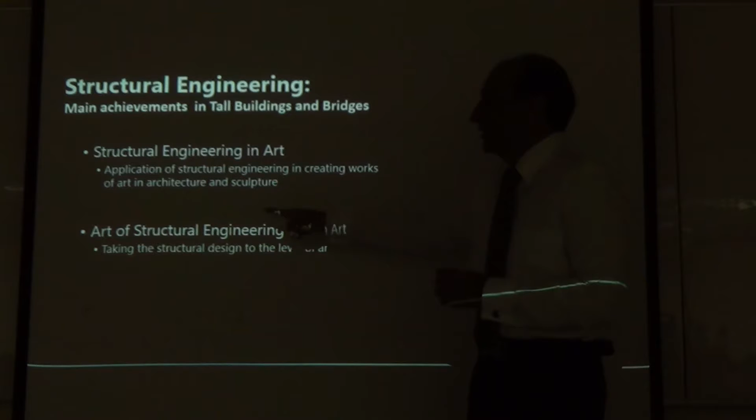So structural engineering is, in art, or there are two sentences you should think about: structural engineering in art, and art of structural engineering. One is the use of structural engineering in assisting people who are creating art. That art could be a bridge project, an architectural monument, or anything. If somebody has conceived something, an architect or anybody, and you help that person make it real, that is structural engineering. Architects cannot, they dream. You make it possible.

Structural engineers make it possible for their dreams to come true. They dream about donut-shaped buildings, all these funny things in Dubai. Who makes it possible? Structural engineers. Architects think about twisting buildings, rotating towers. Who makes it possible? Structural engineers. Some transportation people dream about a bridge connecting two islands. Structural engineers make it possible. So the people who dream are the artists or dreamers, and structural engineering helps them achieve their dreams. That is structural engineering in art.

The second one is art of structural engineering itself. That means any discipline, any field has levels. First of all, everything starts at philosophy. In the old times, we didn't have physics, we didn't have engineers, we just had philosophers, the guys who had all the knowledge, like Socrates, Plato, all these guys. They were good in physics, good in everything. The whole knowledge of that time, one person could possess.

Let's talk about this course now. This course is going to be divided into two groups because we are dealing with two subjects. I have tried to integrate them so we can continue from one course to the other. We will start today with Introduction to Structural Engineering Design and Approaches, one lecture. The second topic will be Introduction to Tall Buildings, one lecture.

Then we will move to Introduction to Bridges. I thought a lot about whether we should finish the buildings first and do the bridges later, but I think that's not a good way to go. The reason is, I want to give you the option to choose your term project, tall building or bridge. But if I teach the bridge later, those who want to do the bridge project will not have any knowledge to do it.

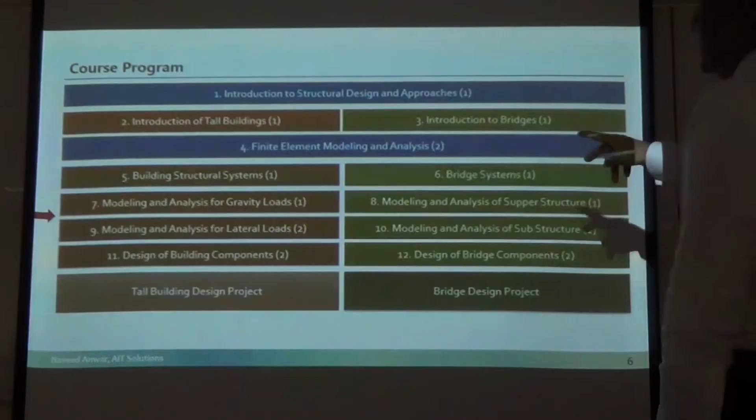Okay, so this is where we will go, we will do that one. Then there's going to be two common lectures on finite element modeling and analysis, common to both courses. I'm hoping Dr. Punchet will also be offering finite element theory, while I will be offering the practice. So this is a little bit ahead of time.

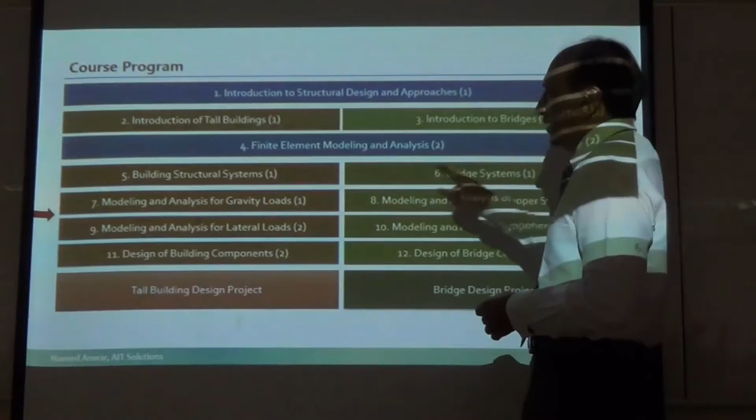Then building structural systems, then bridge systems. Modeling and analysis of gravity loads for buildings, modeling and analysis of superstructure for bridges, modeling and analysis for lateral loads, modeling and analysis of substructure, design of building components, design of bridge components. They will go hand in hand, one lecture on buildings, one on bridges, so you can compare how the two are similar or different.

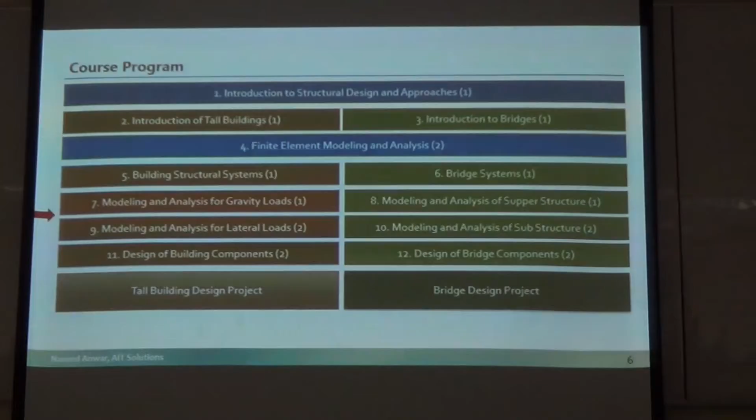After this will be the midterm, and then we will start the project. One real 40-story building, which you will be required to design completely in groups, and one real bridge that you will be required to design as a group. All right, so that is the plan for this course.

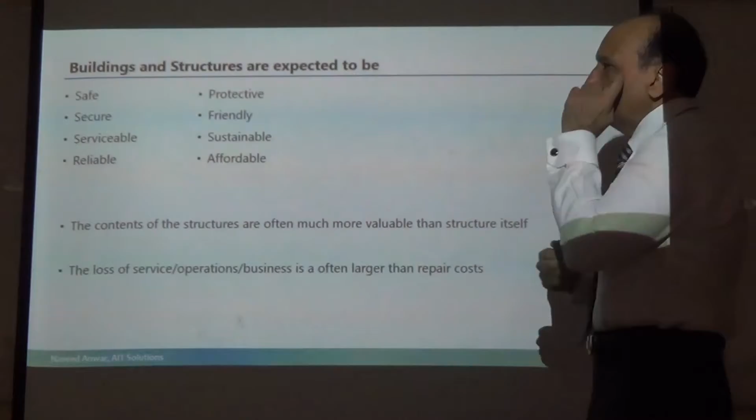These days, buildings and structures are expected to meet changing public expectations. Forget about the Golden Gate Bridge, forget about Burj Khalifa. There are millions of smaller buildings being made, and thousands upon thousands of bridges being made, which are more useful or used by people on a daily basis, and you will be working mostly on those. All of these need to be safe, secure, serviceable, reliable, protective, friendly, sustainable, and affordable. All of this is the expectation of the public, non-engineered people, they want their buildings to be like that.

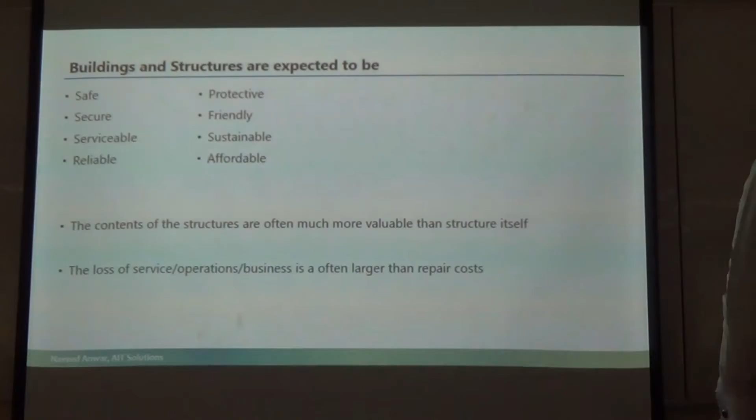The contents of structures are often more valuable than the structure itself. Do not forget that. Most of the time we think structure cost is very important, but actually structure cost these days is much smaller than what is inside the structure. Like a computer center, a hotel, a hospital, the cost of the equipment, furnishing and things inside is much more than the cost of the building. So damage to the structure is not as important to the owner as damage to the property inside.

So it's not only that we have to protect the structures, we also have to protect what is inside them. It's not enough these days to say my structure is going to be standing after an earthquake or a windstorm. No, it's also important that nothing inside the structure will be damaged.

So we have to consider both structural and non-structural, and also the important thing about sustainability. Everybody is talking about environment, climate change, and sustainable structures. So you cannot just make a structure without considering environment and sustainability. So the game is changing.

It's no longer designing reinforcement and thinking, I've done my job. Not enough. You need to think beyond that. You need to sit in a meeting where people will come and say, have you considered sustainability? And you're looking at him, what? Because engineers do not know what sustainability means and how it can be included in their structural design. Those things are important.

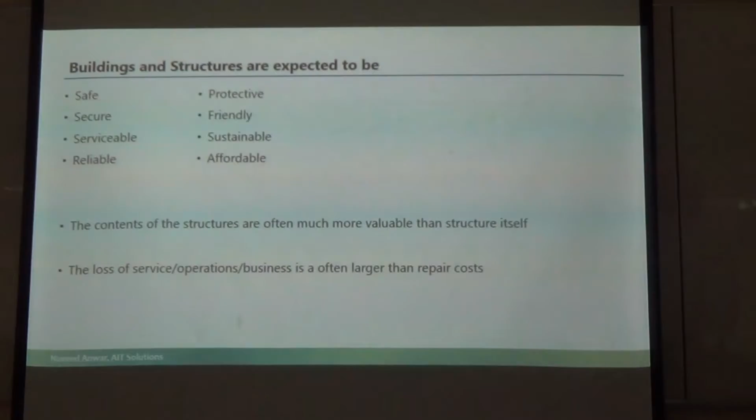This time I have two students doing thesis on non-structural components, damage to non-structural components due to earthquakes, looking at what is the cost of that, because we need to be able to design for that.

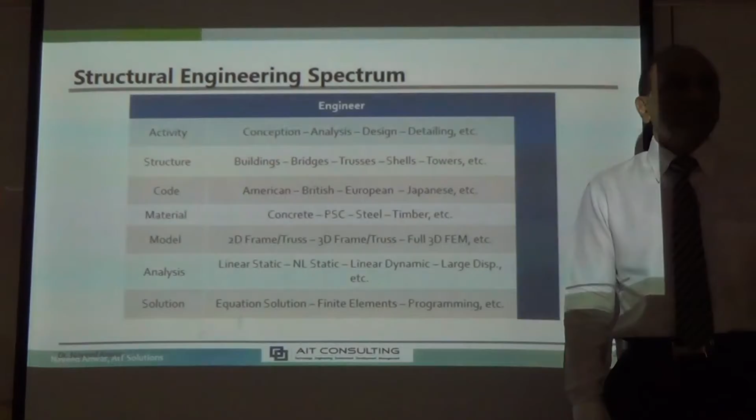Structural engineering is a big field, a very large spectrum. It is very broad. If you look at it, in terms of the engineer, they are required to do many things: conception, analysis, design, detailing, and so many things. There are many structures to design: buildings, bridges, trusses, shells, towers, and so many others. There are many codes to follow: American, British, European, and so on. Many materials in which you can design: concrete, pre-stressed concrete, steel, timber, composite. Many modeling that you can do, many analyses: linear, non-linear, static, dynamic, many types of solutions you can follow. So it's a very broad field, too many things to do.

And no one person can be an expert in all of that. Or maybe you can, by the time you reach my age, but not so soon, right? But you have to choose a bit about what specialty you want to go and work in, in terms of the type of structure you want to specialize in, in terms of the materials you will be focusing on, and so on.

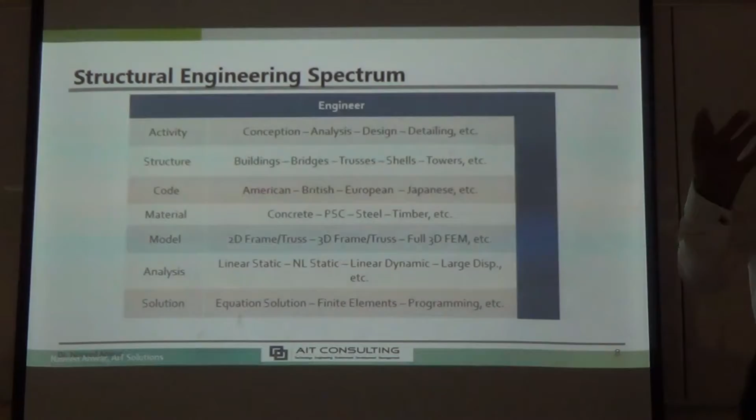If you're going to work in international organizations, building codes, you have to learn many. One may not be enough. That's why last course we tried to learn things beyond the building code, so that you can use any building code. Linear analysis, you should be able to do different types of analysis. Simple analysis that people do is not enough anymore. You have to go beyond that, especially if you have done a master's degree. People will expect you to go beyond the normal. So we need to learn all of that.

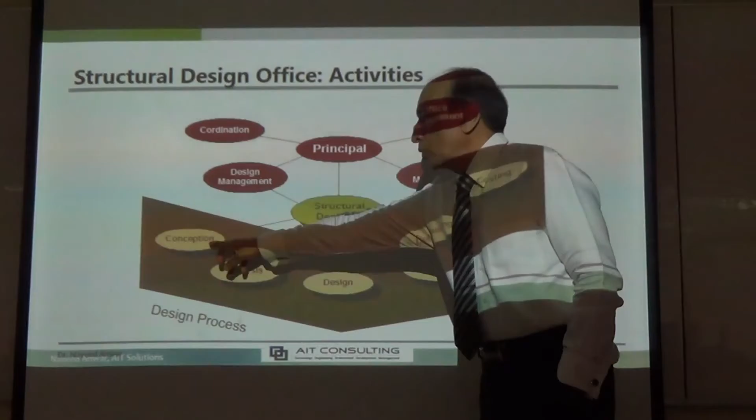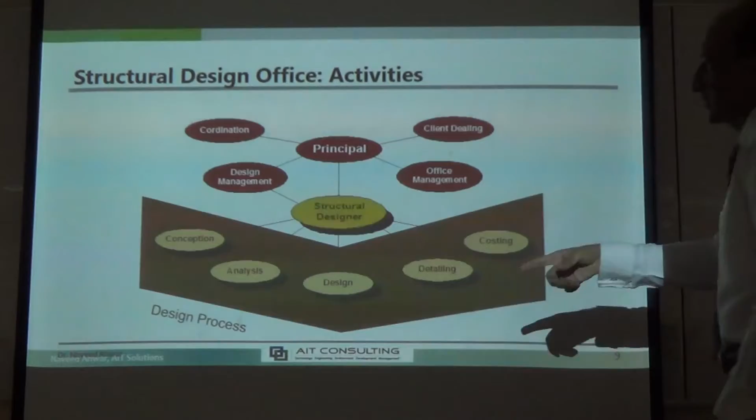Design office, as I mentioned, in a typical design office, engineers are required to do these activities: conceive, conception, create the concept, develop the building system, develop the structural system, think about how to solve the problem, the bigger decisions. Analysis, modeling and analysis, then design, then detailing, then costing. So you need to know the costing. Many of my theses this time are related to costing.

For example, finding the least cost bridge type for a flyover. What is the most economical span for a bridge? What is the most economical structural system for a building? So cost becomes important. If you have no idea about costing, you cannot be a good structural engineer, because that's the first question anybody will ask you. They will come to your office and say, which is the most economical structural system for my building? What do you say? Let me work on it and I'll tell you after 1 month? No, they will say, okay, bye-bye, let me go find a person who has the answer right now. So you need to have this knowledge and understanding of the cost related to structure and structural systems.

So all of these things, and detailing - no matter what you do, the final output of your design is detailing, the drawings that you send to the site. The person who is going to construct the bridge or the building, they only look at your drawings. They do not care, or do not know, which software you use to design, what method you use, nonlinear analysis, linear analysis, which code you use.

It doesn't matter. All they have is a drawing in front of them telling them, make a column of 1 meter by 1.2 meter and put 24 bars, 5 here, 6 here, put the ties here, the spacing of that. That's it. Put concrete of this strength. That's all the information they have and want to know. How that information becomes a real structure is up to you. So detailing is very important.

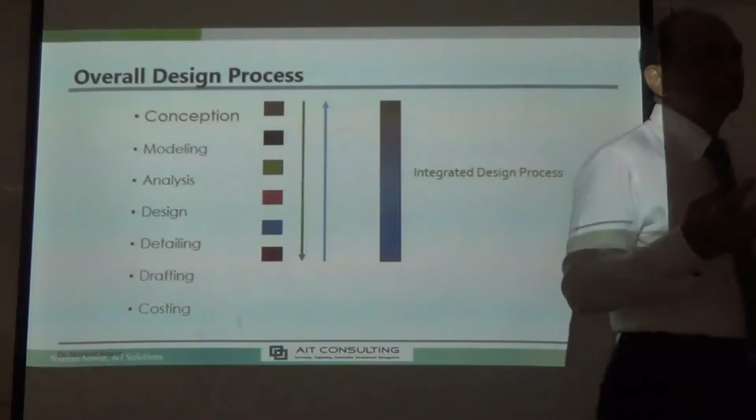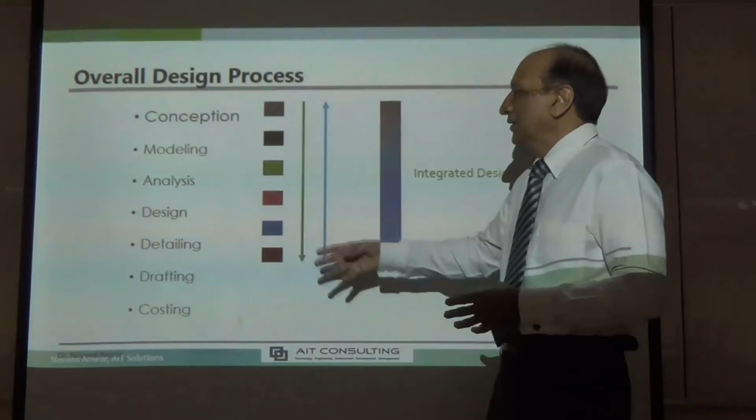This is the typical way that most engineers should work. They should start with conception, meaning the idea of how to solve a problem, how to design a structure, what system to use. Then go from that to modeling, converting that idea into a mathematical model or a computer model. From that modeling, go to analysis, analyze the model, not the structure. Then design the elements, do the detailing, and then drafting and costing. So that is how, step by step, we go from one to the other.

Yes, you want to ask something? No? Just waving your hands.

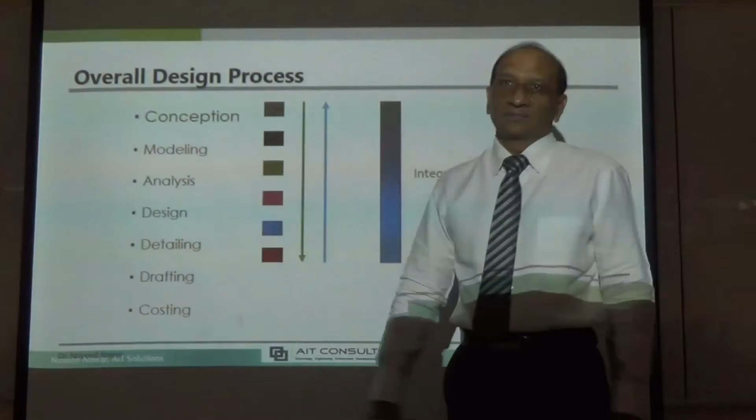But most of the time, this is not possible. Theoretically, it should go step by step, but actually it's not possible. The client may come to you and say, tell me the cost of this system, bypassing all the other steps, which means you need to know the answers to many things without going through the process. This is very difficult, very strange, because you haven't done the design yet and somebody is already asking you the cost. You might say this is ridiculous, but that's reality.

And then when you start the process and finish everything, the client changes their mind. They say, oh no, I don't like this, can you change this? Then you have to go back and revise. All the time things are changing, so you have to keep going up and down in your process.

That's why we say this is an integrated design process. That means all the steps are happening at the same time in your mind. A good structural engineer should be able to do everything at the same time. So when doing the conception, the cost is already in mind. Doing the modeling, the results are already in mind. You develop this sense of the whole process in an integrated manner. Once you have enough experience and knowledge, you should be able to do that.

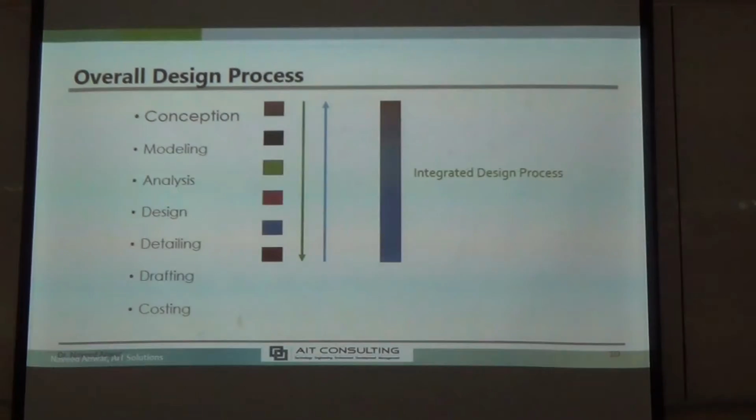So you can divide the process into three main categories. Whether it is bridge or building or any design, it is three groups of activities. I'm going to talk about each of those groups in different lectures.

The first one is conceptual design, the most important step. That means deciding what is going to be my solution to the problem. I have a problem: the architect says I want to design a building, 50-story, 40-story, that is the planning. What system am I going to use? Concept of the system, structural system concept. This is called conceptual design.

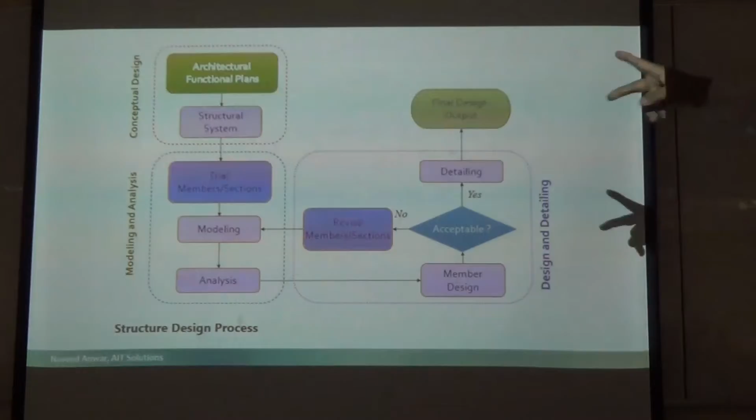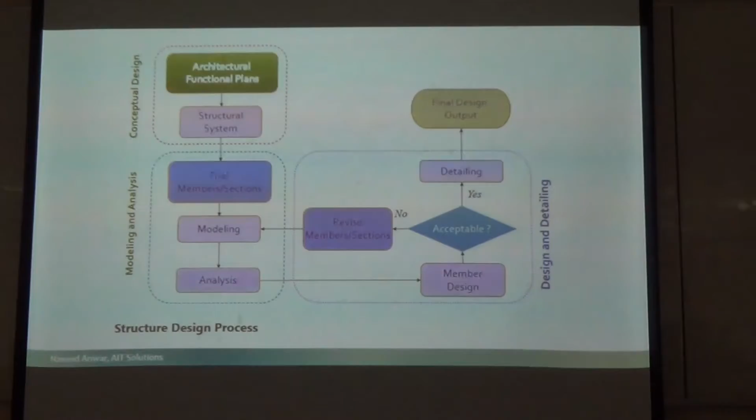So the first lecture or two will be about this part, a very important part, because if you make a mistake here, you will go in the wrong direction. It's just like you want to go there, but you start in this other direction, and you have to do a lot of corrections to get back on track. So the structural system must be more or less in the same direction that you want to go. That decision is very important.

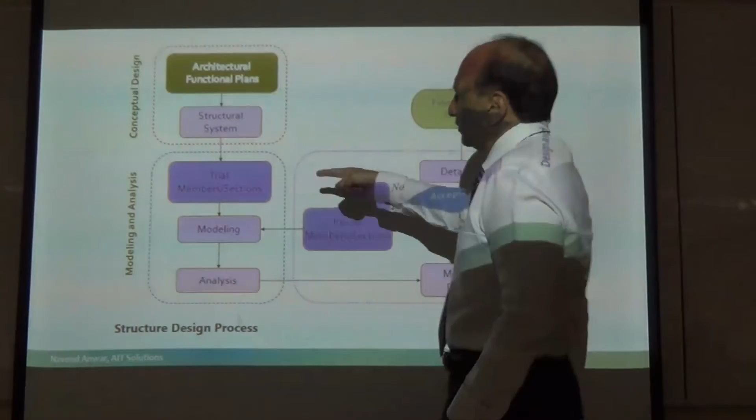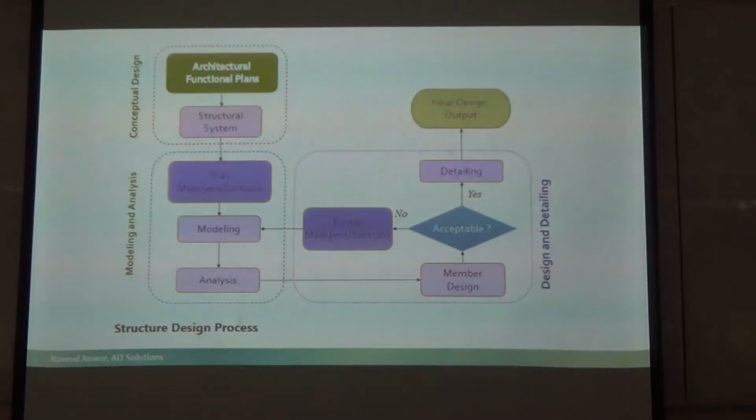Modeling and analysis are technical, highly technical steps. Conceptual design requires thinking, imagination, innovation, while this step is more or less mechanical, meaning more or less procedure, learning the techniques, the tools, how to do things, learning the program. So trial sections, modeling, and analysis are combined into one process where you need to use the software. We will spend four lectures on this part, two plus two.

This one is called design and detailing. That means after the analysis is done and you get the result, you have to figure out what size of member you want to use, how much reinforcement you want to put, using your knowledge of...

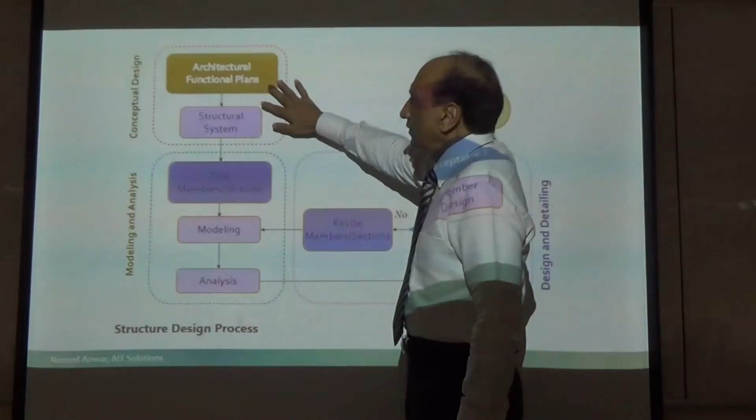In this case, we are going to talk about the concept. Here you will need the knowledge from Dr. Pennung, Professor Pennung, about dynamics, and from Dr. Punchet, about structural analysis and finite element analysis.

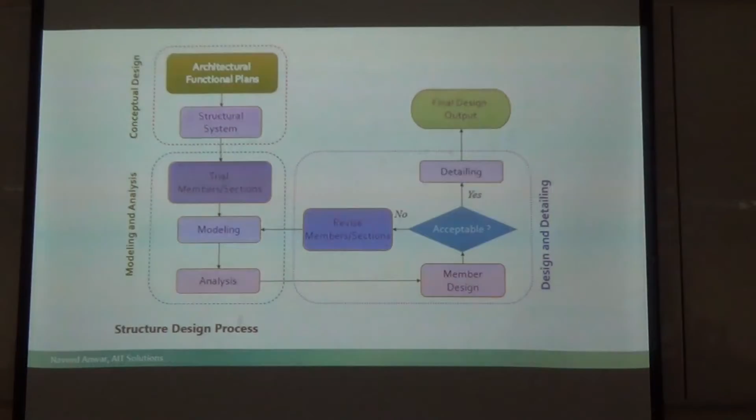Those kind of backgrounds will be needed on structural analysis, theory of structures, structural dynamics, wind engineering, earthquake engineering. All of those will come, moving load, those kind of things will come here.

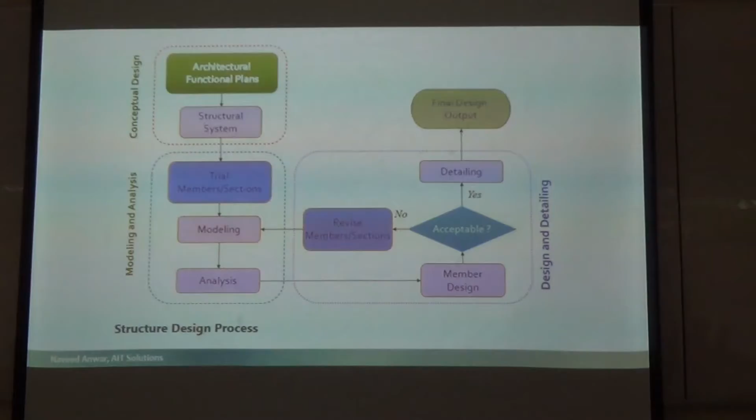In this group, design and detailing, we are going to talk about design of components, design of beams, design of slab, design of foundation. So you will need knowledge from concrete design. We are not going to do steel, so steel can be out. We are only doing concrete. So you will need the concrete design knowledge. You will also need some knowledge about foundation design, things like that.

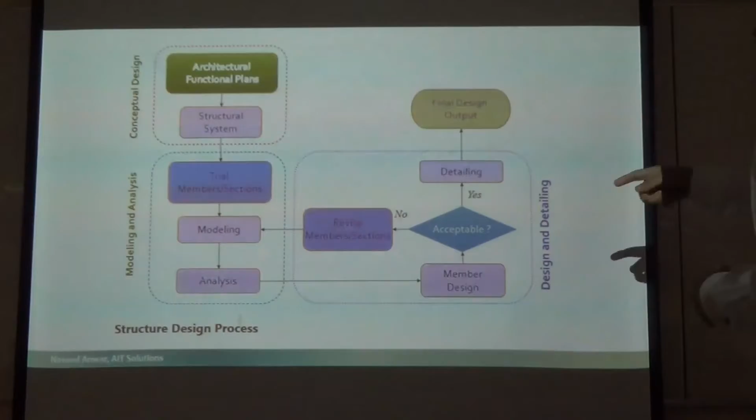And then we will get the detailing. We will talk about it a little bit, and then final output. So this is the overall process, and this is how this course will go.

So when you start any design, I'm talking now about the first part of the group, conceptual design. You need to really understand. Please remember, this course is very practical, so we are talking about the actual way things work out there when you graduate. When you start a project, you need to go through what is called a pre-design phase. Before you design, you have some information gathering. You need to gather information, collect data, understand the problem. This is called a pre-design phase, in which you talk to people, talk to the client, ask what do you want. So it's more like understanding the problem before you start designing. And you talk to many people at that time, or many people will come and talk to you.

Then site analysis. Second part is where it is going to be made, this structure, bridge or building. Is it going to be in Thailand, Philippines, Myanmar, where? Because that will govern many things. It will govern the loads, the codes, the material, the construction methods, it will govern many things. So you need to understand where it is going to be. Not everywhere do the same rules apply. So location or the site is important. Then also about the location, what is the ground condition, what is the seismic loading, what is the wind direction, all of that information will be needed.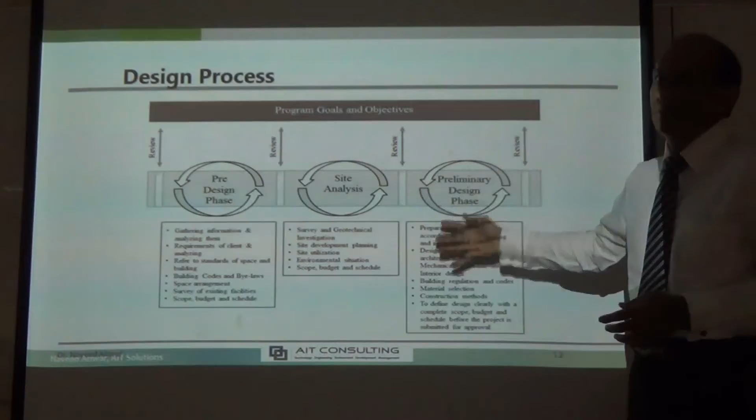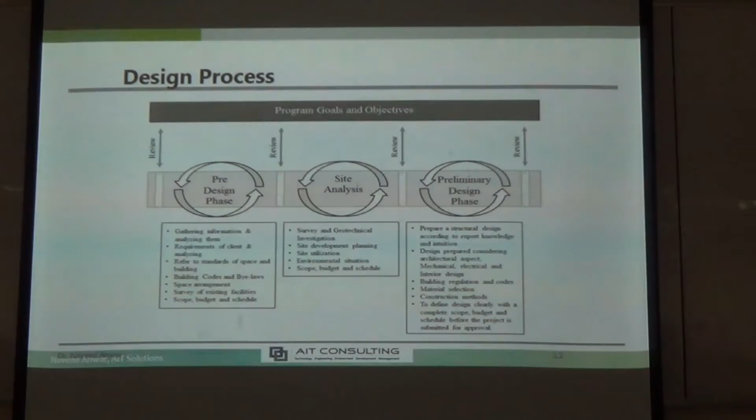So first, understand what is to be built. Second, understand the location and site where it will be built. And then we do a preliminary design. Preliminary design means we do some simple hand calculations or use thumb rules, or use our knowledge and experience to come up with some possible solutions. And then we go to the detailed design. So that's how the process works. And this is for any project, doesn't matter. Building, bridge, water tank, anything you want to do goes through the same process.

Now, coming back to our role as structural engineers, what is the main purpose of design? If you look at the very main purpose of the design, there are many purposes, but the very main purpose is this one. I showed this slide before also, right? No? Yes? Never mind, you forgot. Don't worry, they forget already.

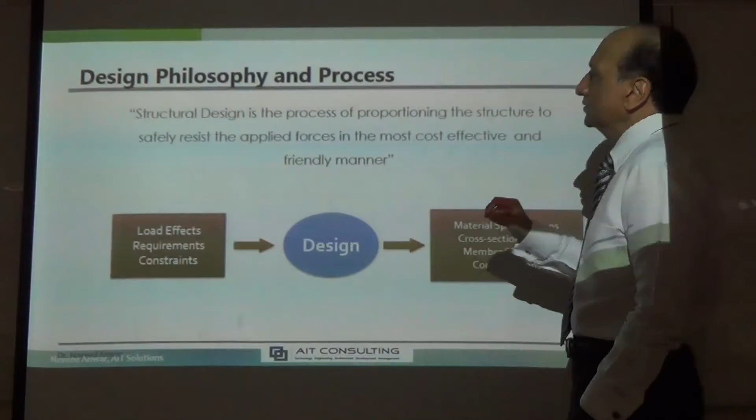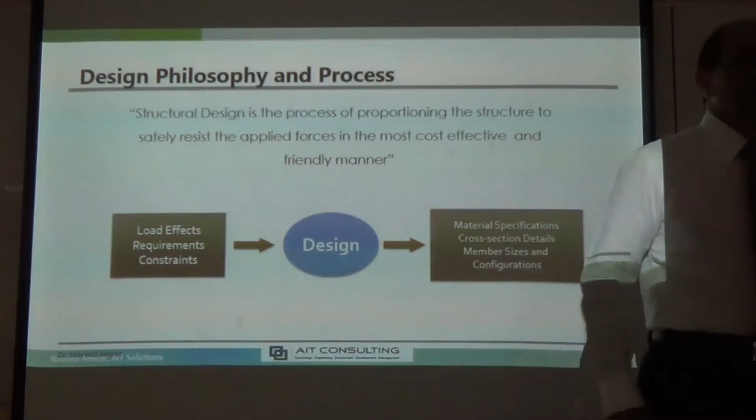Structural design is the process. Please understand this definition very clearly. It contains very deep, important meaning. Every word is very important. Structural design is the process of proportioning the structure to safely resist the applied forces in the most cost-effective and friendly manner. So it is a process in which we have to proportion the structure. What does it mean, proportion? Proportion means sizing members, materials, reinforcement, how they are put together. Everything about assembling the structure or defining the structure is called proportioning.

And that is the main task, to proportion the structure to serve its purpose in such a way that it safely resists the applied forces due to any reason. At the same time, it is cost effective, meaning the cost is acceptable within range. You cannot just make something so expensive that it cannot be made. Unless it's Dubai, they just make anything. But in the real world, other than Dubai, cost is very important.

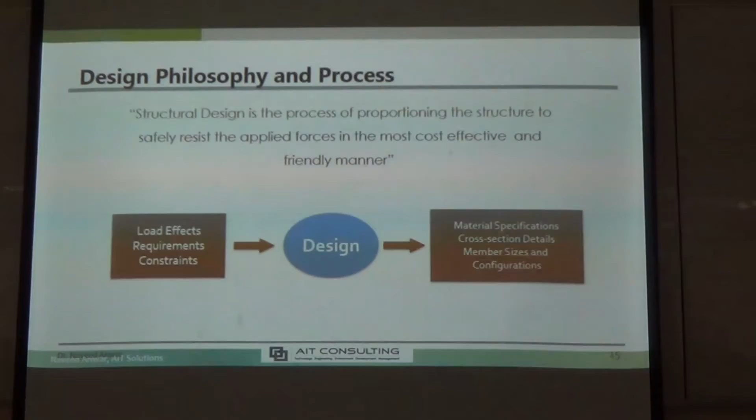And friendly manner, what does it mean, friendly? Friendly means everything friendly: user friendly, environment friendly, sustainable. Many friendly things come into play. So it's not only safety, but all the other things come into play. Structural design is a process in which you take a requirement, form a system, and find the sizes in such a way that it is safe, number one. At the same time, cost is acceptable, number two, and it's friendly, number three. So all these three things are very important, and these are big definitions.

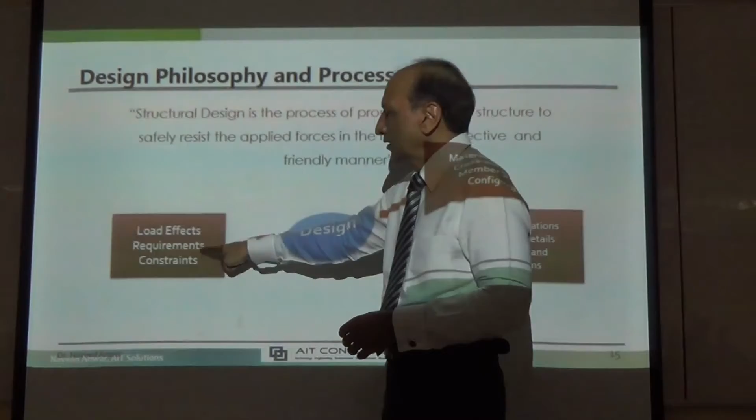So in theory, load, requirement, constraints go to the design and come up with the outcome which can be sent to the site: material specification, cross-section details, member sizes, configuration. So these are drawings. Basically it's like a black box to the outside world.

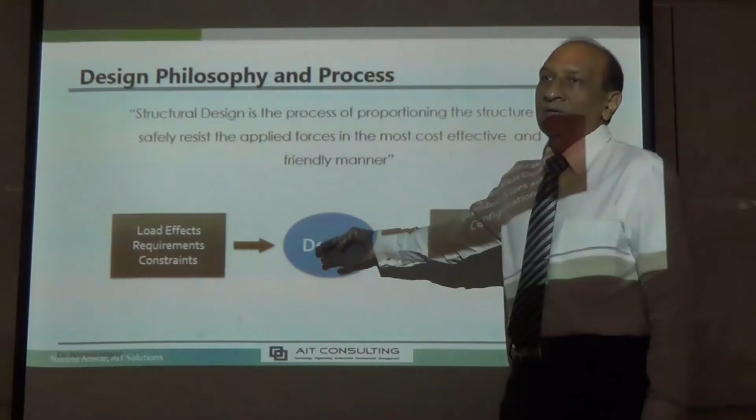They hire the engineer, give them the requirement, and expect drawings to come out. It's like a machine: you put something in, and drawings come out. But inside, there are many things to do in this design process, and that's what we're trying to learn. Let me talk about two important definitions: structural analysis and structural design. Both are part of the design process but very different activities. In big organizations, engineers who do analysis are a different group from those who do design, detailing, costing, or conception. In a small firm, you do everything.

So, analysis and design. Structural analysis is a procedure where you take the structure, create a model, use a computer program, and calculate the response of the structure, and then you stop. Design is a process where you take that response and use it to find the sizes, material specifications, reinforcement, and section sizes, and after that send it to the drafting people.

So analysis is general, can be applied using the same software for everything. Design is very special, different procedures for beams, columns, steel, concrete, slabs, and so on. So design is very broad, while analysis is more standardized and generalized. We will spend time on both of these.

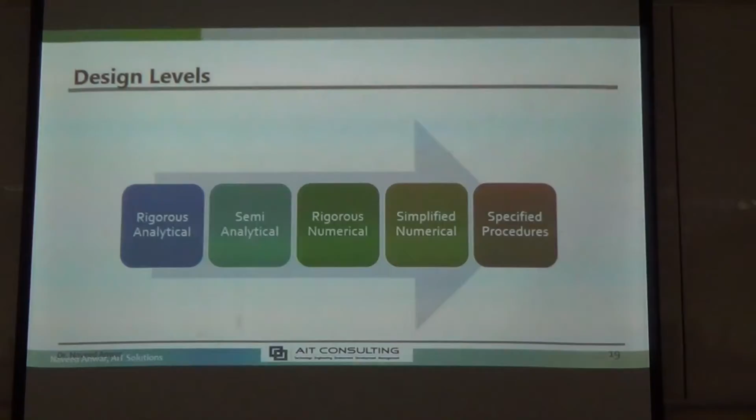Let me skip this one today.

The one question you will be asked in your career, whenever you work in this field, is: is my structure safe? Clients, the public, your family will ask you this. I live in a building, and once in the elevator a guy asked what I do. I said I'm a structural engineer. He asked, is this building safe for earthquakes? We just met, and his first question is whether the building we're in is safe, expecting me to answer right away without doing anything. What can I answer him?

Let me make a model, go back to the office, give me 100,000 baht or whatever, and give me six months, and I'll come back with the answer. He would lose interest completely.

But this is the most common question you'll be asked, and unfortunately structural engineers do not have the answer to this basic question. I told you the main objective of structural design is safety, but even after that we still cannot answer this question. Actually, you cannot say it's safe, because safety has a very difficult definition. If you think you can answer that question, you are wrong. Stop thinking that you can answer that question.

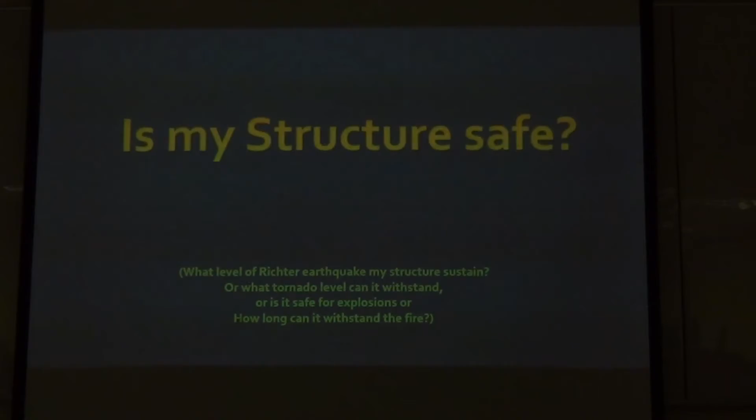And the next question is, what if I want to increase the life of a structure? What will you do? Can you design a structure which will last 200 years? Or 100 years? We don't think about this, because we don't relate the structural design to the final questions that people are asking. That is why the structural design process is going through evolution, changing design philosophy and approach. I want to tell you where we are going. We will not go there in this class, we cannot, but at least you know where we are heading as a profession.

This is what is happening in structural understanding over history. Long time ago, we started with certain methods and now we are changing and evolving into newer methods. I want to share with you how this process is going on, where we are at this time, and where we plan to go. Not you and I, but engineers in general.

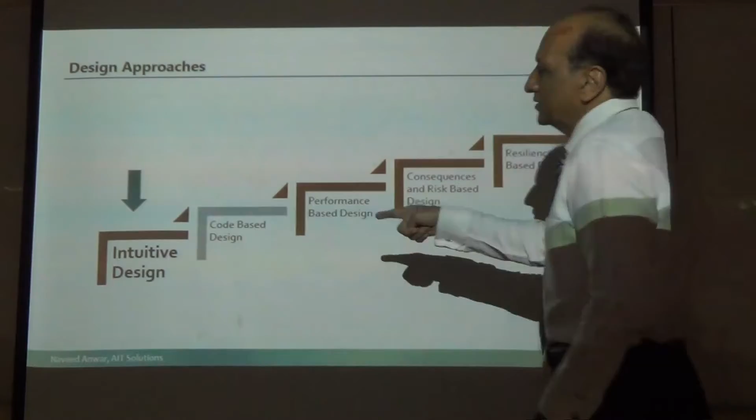So these are the steps that we have to climb, that we are going ahead now. First step was intuitive design, which was history.

People before computers, before calculations, before mathematics was invented too strongly, pyramids were made. Seven wonders of the world, most of them were made before computers, almost all of them, which means people had some understanding of designing huge things without calculations. That was intuitive design. People just knew something through experience or something, and they could create these enormous, huge structures or wonders. So that was intuitive design.

It still works, you can still do that. So what you can do now is do the intuitive design first, and then check the design by other methods later. The best way to learn structural engineering is to do the design without calculations first, keep it on the side, and then say, okay, let me check what I did. Rather than start the process as if you're trained to do some work, like a robot, don't do that.

So the good way is that when you get a problem, you say, I will touch the computer later. Let me think what the solution might be. Let me think what the column size should be. Let me think what the reinforcement might be. Just think from your side, don't do any calculations. Imagine that you are living 1,000 years ago. What would you do? How would you solve this problem where you had no calculators, no computers, nothing - only your brain? How would you solve that problem and solve it? Keep it on the side, then go to the next steps, then cross-check. Then you will learn much faster.

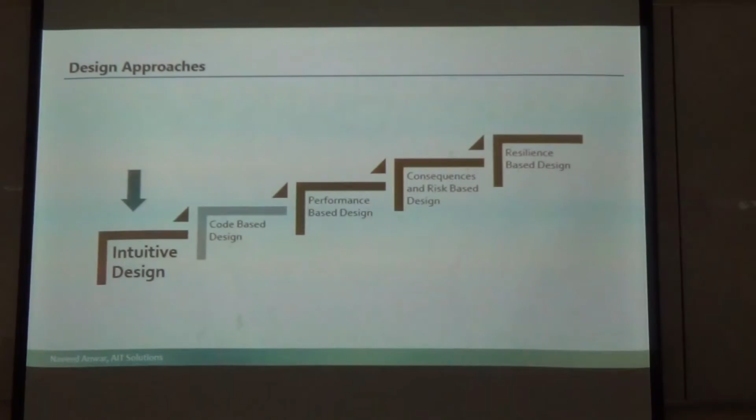Anyway, so this one was the old time, or it can still be used - intuitive design, only from your mind, from your intuition, you can design. But then came codes. Codes said this is not good enough.

Because you are dealing with public safety, you cannot play with public safety. What if your intuition is wrong? People will die, right? So building codes came in, regulations, rules. They said, no, you cannot do your intuition too much. You are not as good as people in the past, because in the past only the masters, a few people in the world, could build buildings of that kind. Now we have millions of engineers, so not everybody is of that level. So building codes come and define what you can do and what you cannot do to protect public safety, so that a large number of engineers can now do the design following the building code without doing intuitive design. The ones who do not have the capability to do intuitive design can follow the code.

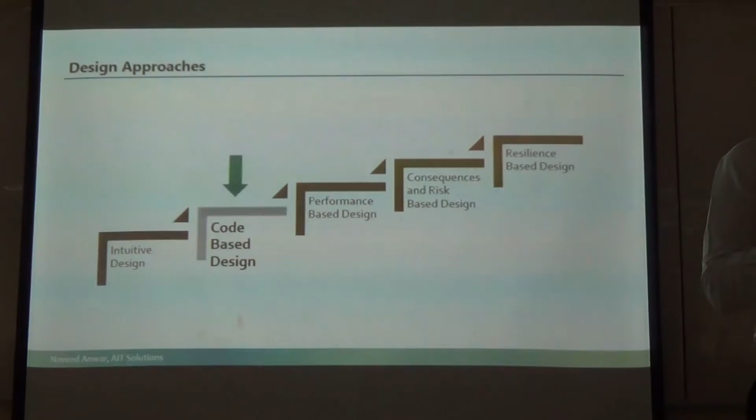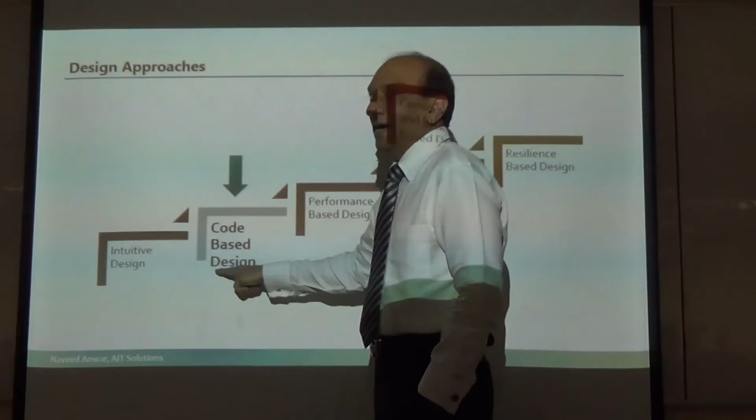And this is problem number one, why we cannot answer that question - building codes. And you know me, I have been always against following the building codes blindly, right? So building codes is one reason which prevents innovation. But they have a reason to do that because they don't want people to go out of control for public safety. So building codes is the second step, which is where we were, or we still are, at this time. We must follow the building codes, otherwise your design will not be approved, will not be built, people will not believe you. So following the building code is now a requirement to some extent.

So if you look at the building codes, the first building code was written in 1666. There was a great fire in London. The whole of London burned down, if you study history. And after that, they said, no, we must have fire code, we must have building code to make the buildings fire resistant. We don't want London to burn down again. So the first building code was developed basically to make the buildings fireproof, to make sure that the buildings will not catch fire, or they had at least 2-hour fire resistance rating so people can get out.

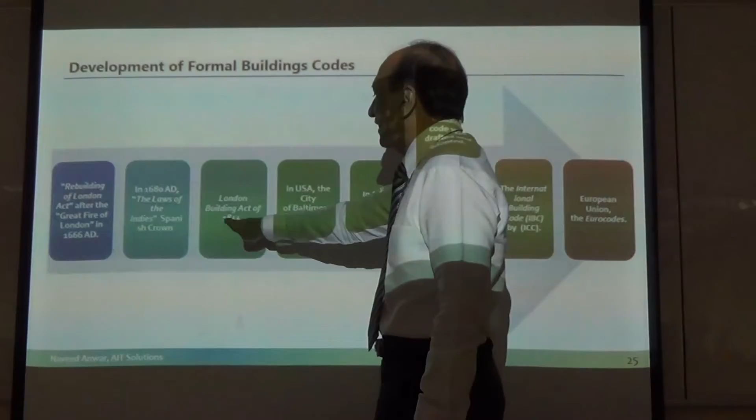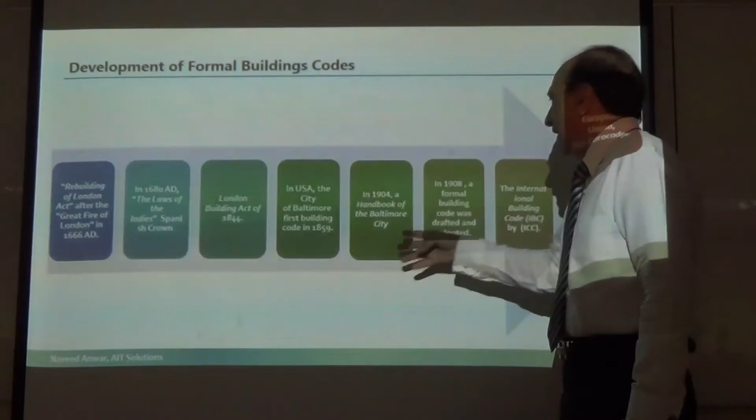So that was the first. After that, in 1680, the laws of the Indies in the Spanish crown in Spain, they made laws for buildings. So it started that time ago. Then London Building Act 1844, and then in USA the first building code was introduced in 1859 in Baltimore, and then after that 1904 Baltimore City Code, and then after that 1908 first building code, and so on. And after that millions of codes came up. Now we have thousands upon thousands of codes. But only in the last century, after that, we have the International Building Code IBC formed, and then European codes came in and British codes came in. So that is the history of the building codes.

So it started with that, and now we have so many building codes in every country, in every region, every city. We have lots of building codes, very, very complicated. So many, some books, some codes are very, very thick. And most engineers have never read them because they're so busy doing the work that they only read parts of the code, they don't understand the whole code. But anyway, so these are the building codes. And we must learn parts of the building code in any case.

Please try to understand the building codes, what they are used for and what is their objective. Basically, the objective of the building code is to make sure that we design something which is safe for the public. Minimum standards are followed. So we don't do something which will lead to unsafe structures or to a situation where public safety will be affected. So they give you all these rules, extremely detailed prescriptions and equations using numbers. Do this, do this, do this, do this, do this. I don't want to go into detail, but basically they give you all these.

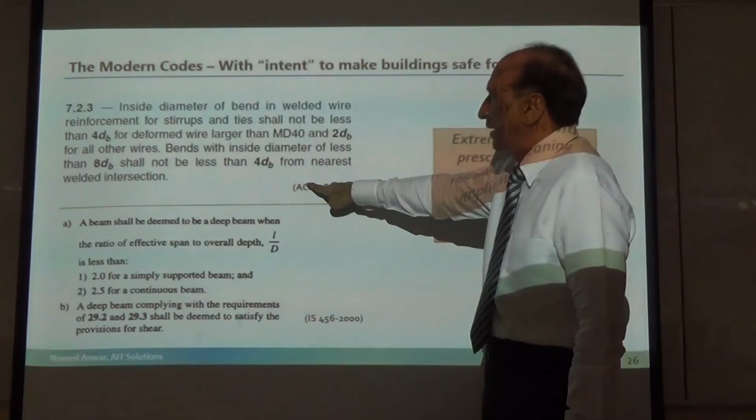This is some requirement from the code. This is from American code. This is from IS code. And they give you these numbers, very clear limits. So they try to define everything for you. But these definitions are not real. They are basically intended to give some control. Okay, we'll come back to this one.

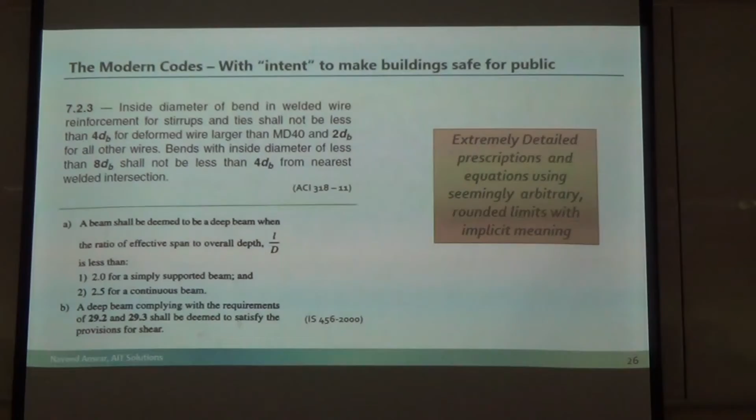The problem with the building codes is that they cannot cover every case in reality. So they try to cover some normal common cases. So if you want to do something beyond that, building codes may not help you. So you have so many building codes from various countries.

The question is always, I ask this question, are all building codes correct? Suppose you are sitting here in Thailand or in your country and you design a building according to British code, American code, Thai code, Russian code. Will you get the same answer? What do you think? Yes or no? No, you will not.

Then the question comes, which answer is the right one? If you get 6 different answers for a beam reinforcement, which is the correct one? What do you think? 6 answers cannot be right. So the question is, which one is right? If none of them is right, then all of them are not right by logic, right? So that is the problem, that there is no right answer from the code because the codes, they are different.

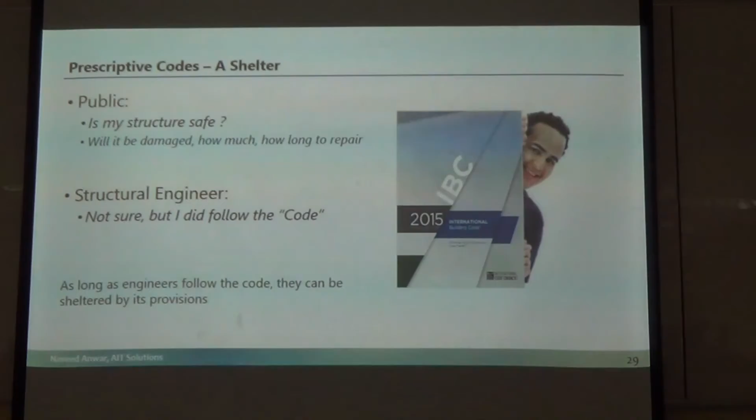So this guy is hiding behind the codes, the structural engineer, saying 'I don't know anything, I just follow the code. Don't ask me, ask this code.' And that's exactly what engineers say. Whenever something goes wrong, they go to the engineer and he says, 'I followed the code, you can check my calculation.' But if your calculation is okay and the structure fell down, why? Of course there could be other reasons, but the question remains that we need to do better.

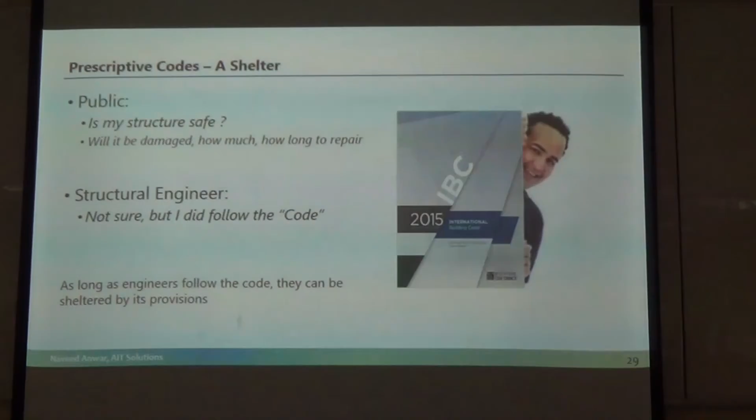And that's why we have that ladder where we have to go.

Let me skip that and give you something interesting. This is a reading from Hammurabi. Hammurabi was a king long time ago, and he made all these laws, the laws of Hammurabi. If you read them, very threatening, very dangerous. He did a lot of work, and it was long time ago—about 4,000 years old, written on tablets, no paper at that time. And it says: if a builder builds a house for someone and does not construct it properly, and the house which he built falls in and kills its owner, that builder should be put to death.

Eye for an eye. So if a structural engineer or builder—at that time no structural engineers, just builders—did not build the house properly, and somebody died, you must die also. That is the rule of the law. So that was the first building code, the first regulation. But they did not tell you how to do this, did not tell you put so much reinforcement or this or that—they just made the law: do it well, whatever you do, so it does not fall down. So responsibility lies entirely on the builder, 100%. The builder must use whatever they want, they can.

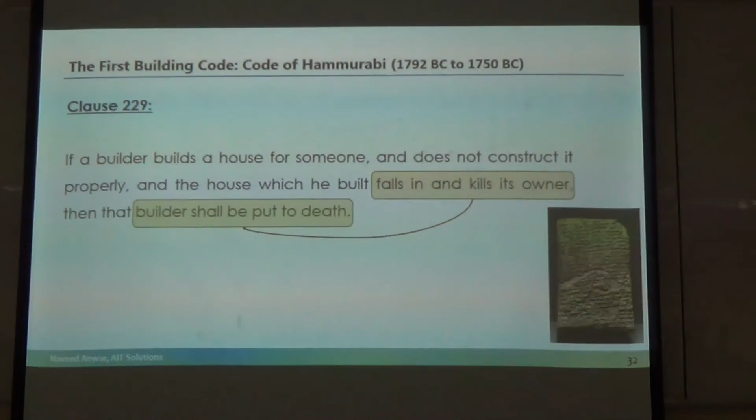This is the intent of the new thinking: that we should do whatever we can to make it safe, not just follow the rule and say 'I follow the code.' So this is 4,000 years ago, some people start thinking about it. There is a rule, there is a consequence—it's consequence based. This idea is coming back now. Of course, not to kill the structural engineer, but to do better. So now we are going to the next step, which is performance-based design.

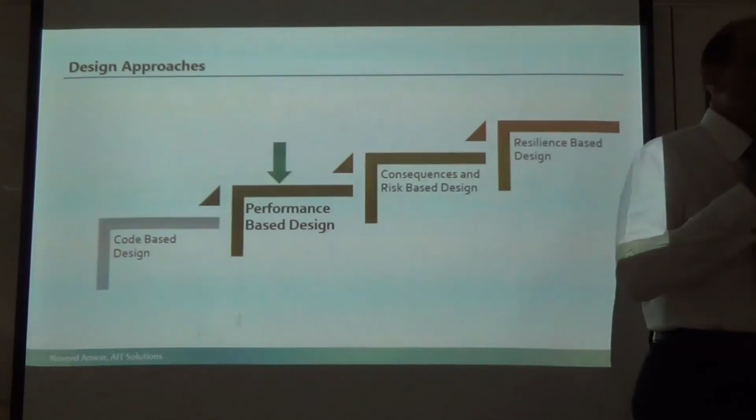So this code-based design is okay, but not the ultimate, because it does not satisfy what people want and what the public wants. So we have the next step in the ladder: performance-based design. This says we will satisfy some performance—a very clear performance objective—and you do the detailed design to satisfy that. One of the things AIT is now famous for is PBD, performance-based design. We are one of the few organizations or people who do this properly, especially for tall buildings. So PBD is a specialty at AIT. Not many people do this well.

After that, I don't want to go into too much detail, we have done so much work on that. Performance-based design is a new code, a new way of doing things.

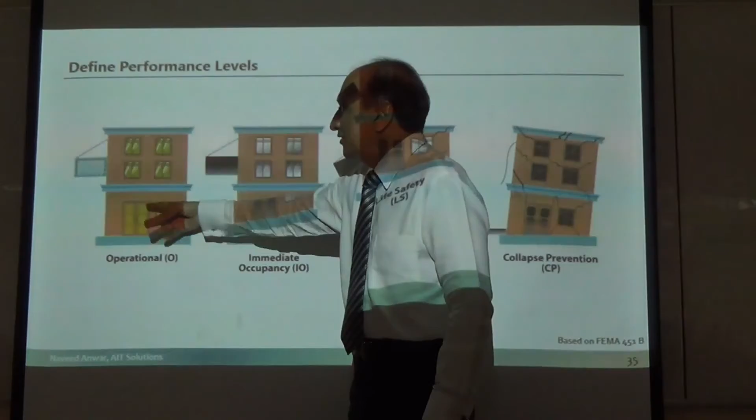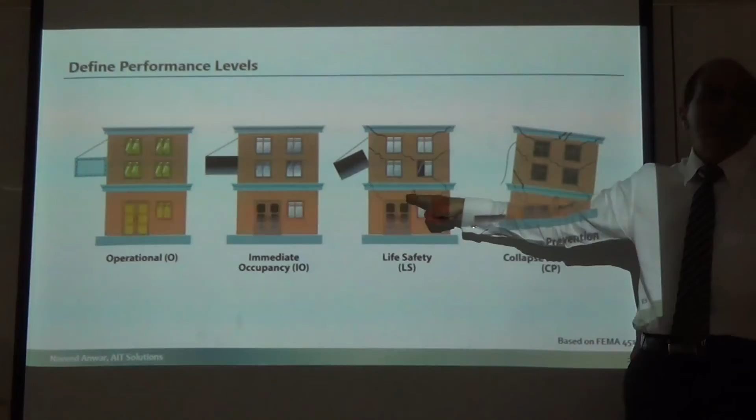Basically, you talk about not only life safety, but different levels of damage to the building. For example, operational means lights are on, everything is fine. Immediate occupancy means after a windstorm or earthquake, you temporarily go out, then come back. Life safety is what the codes are trying to say - that life should be safe, but they don't say what happens to the walls, windows, and doors. So life safety is important, and then there's collapse prevention. Performance-based design looks at each aspect individually in detail.

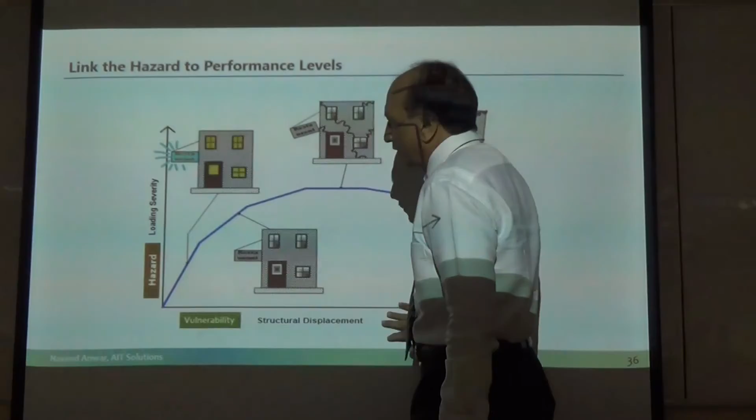So explicitly, after PBD, you can say that yes, my structure is safe for a certain condition. By code-based design, you cannot say that. But with performance-based design, you can claim that after doing the analysis. So performance-based design is the next step - you can relate it to the loading, to calculation, to everything. This is something I will go into more detail on, maybe in a special seminar.

Actually, it follows the code. This is not an unsafe structure. If you look at the design calculation, nothing is wrong with it. The code says that at this earthquake level, the building should not fall down - and it did not fall down. Nobody died in this building either.

Yes, maybe 1% - it's due to the falling of the brick. Falling of the brick, okay good. Thank you. So 1% because of the non-structural falling of the bricks, right?

So theoretically speaking, this building is code compliant. But all the people who live in this building have to move out. They lost their homes. Most of them worked abroad and sent their money to buy this apartment - am I right? This is a high-class building, and now they have no home to live in, even though the building was designed according to the code.

So the public is saying, what is this? The code-based design is not protecting us. The buildings may have to be torn down or repaired, and it's still like this after two years, one and a half years after the earthquake - people have just lost it. So this is the kind of problem that is not acceptable by society anymore. They want something better done about buildings and structures than just following the code.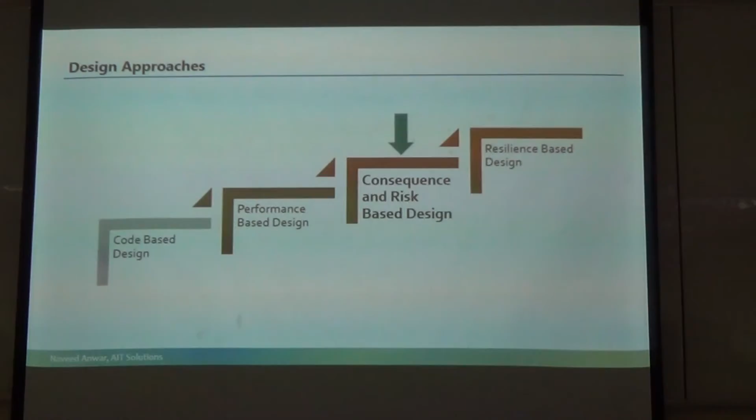So this is not acceptable to the public, even though this is what the engineers would say. If you ask the engineer, he's okay - he's behind the code, it's protecting him. So we have to go to consequence-based design - one more step. What is the consequence of damage? What is affected? If the life of the people is affected, if their livelihood is affected, we must look at the consequence also, not only the damage and the risk of those consequences.

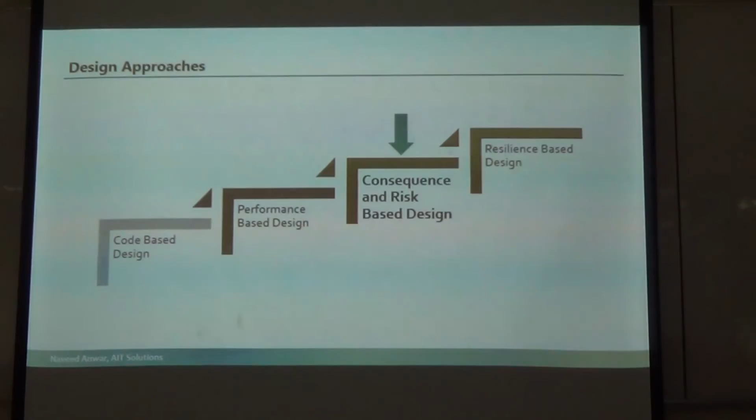So we go to another step, and this is where many people are now working. Code-based is where some people are, very few are here, and very few are now moving to this level. In the future, we are going to the next step, which is called resilience-based design. Beyond PBD, this would not happen if the building was designed following the next step.

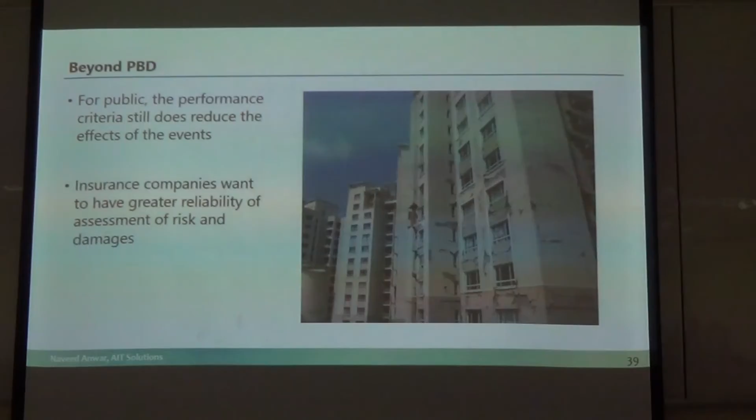So many questions that PBD cannot answer are going to the next level. Consequence-based engineering has a very different approach. Normally as structural engineers, we are taught about designing for a load, designing for wind, designing for earthquake at a certain level. But we don't know for sure if a stronger earthquake will come or not.

For example, you remember the Japan tsunami and the Fukushima nuclear reactor - you know about that, right? You all know. One nuclear reactor leaked because of the earthquake, and the consequence of that event was so great that the whole country's nuclear power plants were shut down, and it went on for many years.

So people are saying forget about the level of the earthquake, forget about anything. If the consequences are very great, it should not happen. So prevent something from happening so that we don't need to deal with the consequences if they are very large, very great, like a power plant failure. So we are looking at those kinds of levels. The trigger of the event is not important, the consequence is important. Why this happened is not important, it should not happen, that's it.

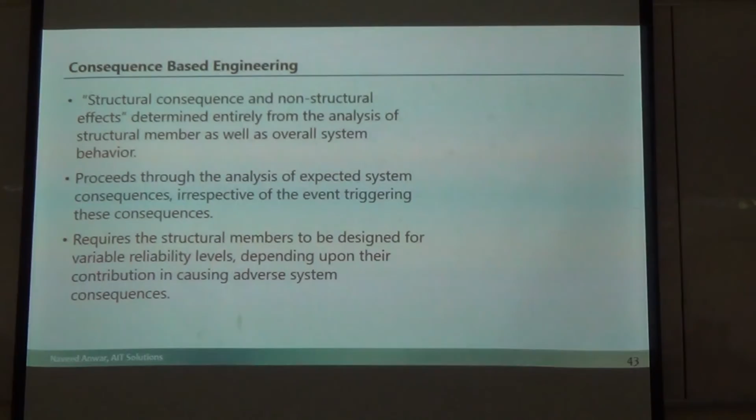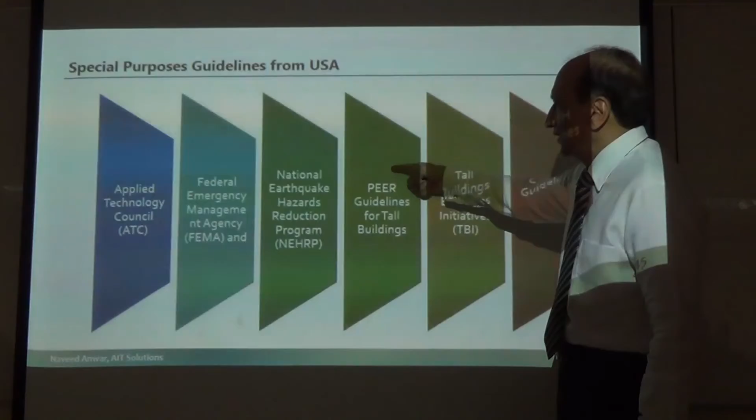So risk-based design procedures have come up. I don't want to go into detail, these are all advanced topics. There are many new codes coming up, and we will be using some of them, especially this one, a very important document: PEER guidelines for tall buildings. This is a new approach for performance-based design, and these are all beyond codes, they are guidelines, not codes anymore. They just tell the engineers you can do this, but they're not forcing you to.

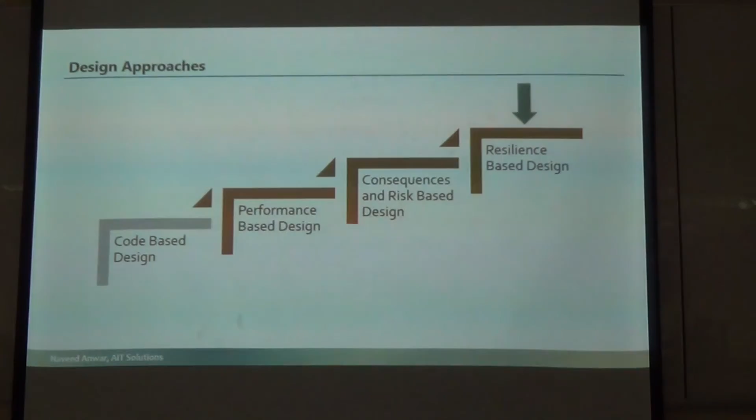Resilience-based design looks at not only the building or bridge, but what the thing stands for. For example, the Golden Gate Bridge, it is destroyed in every movie. But what would happen if it really is destroyed or damaged? The cost of the bridge will be nothing compared to the cost San Francisco will suffer because of the bridge collapse. The economic loss from the people who commute every day will be 100 times more than the cost of the bridge.

So it's not just the structure, what it serves must also be considered. If the structure is very important, a link between two islands, it has to be designed differently than a bridge just connecting a small town. Or if there are 7 bridges and one is destroyed, that's okay, the other 6 are still there. But if there's only one bridge between two islands and that is destroyed, it's a different thing.

So you don't design the bridge individually, you think about what the bridge means to the community, what purpose it's serving. You start to go beyond engineering, to the community level, to the national level, how it will affect the GDP. So you start to really think big, especially for big structures like that. That is called resilience-based design, you have to look at many bigger things.

So resilience looks at quality of life, loss of community and culture, economic loss. Structural engineers thinking about quality of life, thinking about community and culture. Did you ever think that as structural engineers you'd have to worry about that? Yes, in the future you will have to, otherwise people will not respect you, because that is the kind of talk used in meetings now. The public expects you to talk like that, not just say, I'm designing a beam of 20 or 40 centimeters and putting 4 bars in there, that's my job.

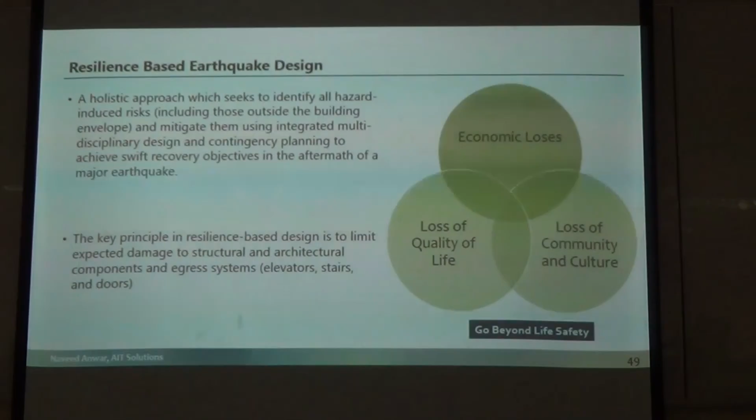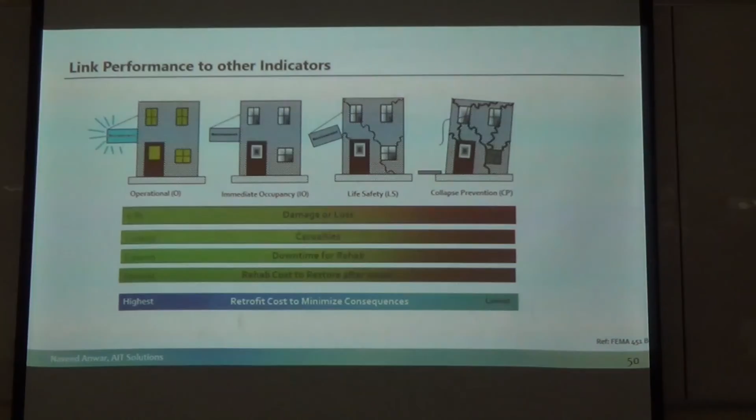That is ultimately going to affect all of that, so we must think on the big picture of what engineers are doing. We link that to damage or loss, to casualties, to downtime for rehab, to rehab cost, retrofit, everything. You think about all of that when you design something. If nothing happens, it's great, but what if something happens? And something does happen all the time around us, we have seen it.

So all of that has an impact on the sustainability of the community. How will it affect the community, or the country, or a city as a whole, because what you're designing is a big thing. That's why now we have this interesting thing. How many people know about LEED? Just one guy? Please, people, two guys know about LEED.

LEED is a certification for green buildings. Do you know about green buildings? What is a green building? Color green? Painted green? What's a green building? Environmental, climate change, everything, the big picture. If you want to make a building good, you make it green.

That means it's environmentally friendly, uses least energy, least resources, it's sustainable, and everything up to that. LEED is one of the certifications. So if you want to make the best building, you get a certified LEED building. LEED Platinum is the highest certified building, then LEED Gold.

So you have to follow many requirements for your building to be rated as green in different categories. What about safety? Engineers are saying, okay, we are going to have the same concept for resilience. Structures will be resilient, not only green, but resilient.

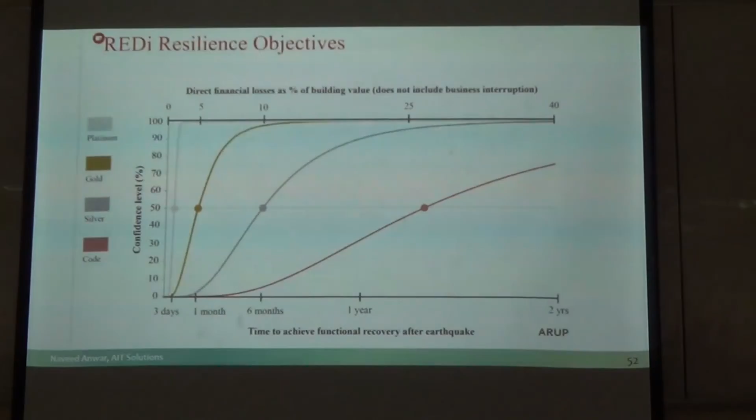So for resilient buildings, I don't want to go into details. Let me go back one more time and show you the steps. So this is what we are talking about: code-based design, performance-based design, consequence-based. For this class, we will only study code-based design, at least the minimum level, for tall buildings and bridges.

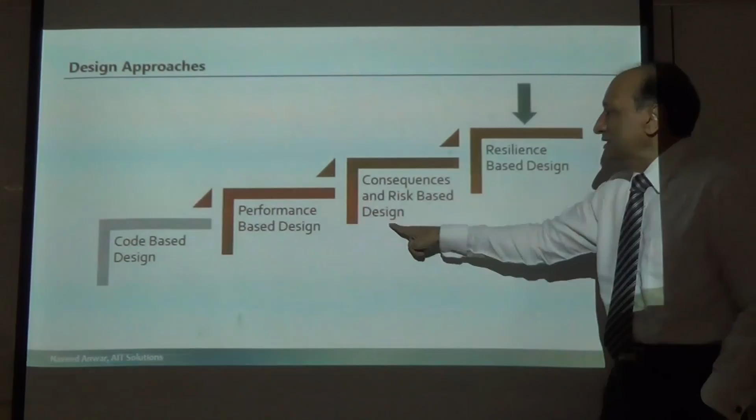Performance-based design we are doing in our offices, so that is more like practical work. We can have some seminars on this one. These two, and then you can choose your thesis research topics to be on any of these three steps, right? So if you want to learn those, you can choose your thesis to be in any of those areas.

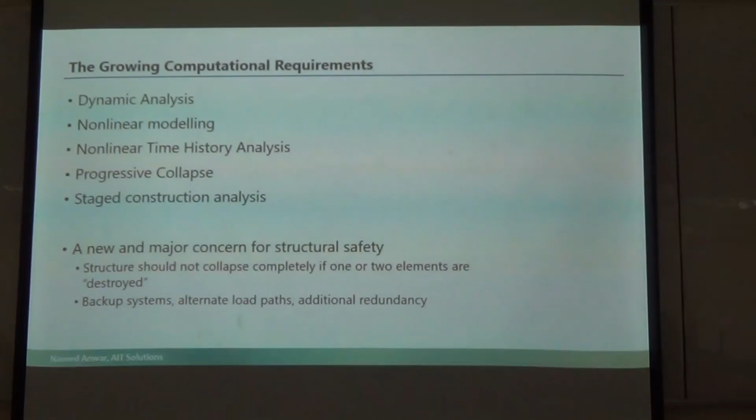Tools. You need to learn, last 5 minutes, give me 5 minutes. So to be able to go there, you will need to learn many things: dynamic analysis, nonlinear modeling, time history analysis, progressive collapse, staged construction, and many things you will need to learn beyond the normal design process. So computers are now very important.

This time one of your seniors is using this to design tall buildings without designing them based on the previous data approach. He is taking previously designed buildings and creating a new artificial neural network so it can design the new building without doing any calculations. So it's possible now to do that.

If you have hundreds of buildings already designed, you can take that data, and when you get a new building, out comes the new building design. Not final, but good enough. So a lot of artificial intelligence can be built into our systems to do the decision making. Again, this is a good topic for research for those of you who are interested.